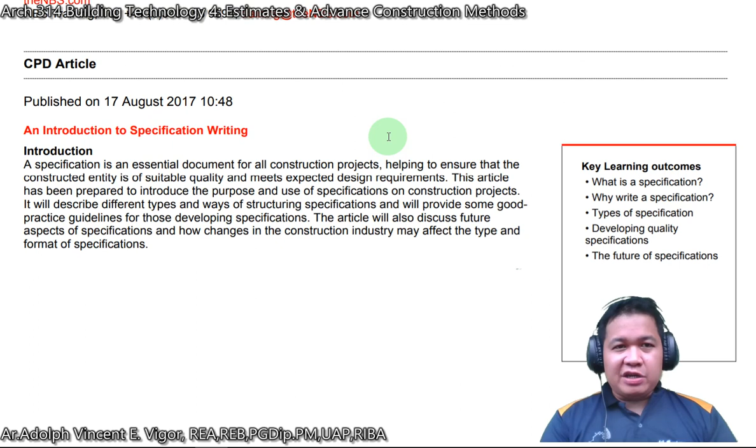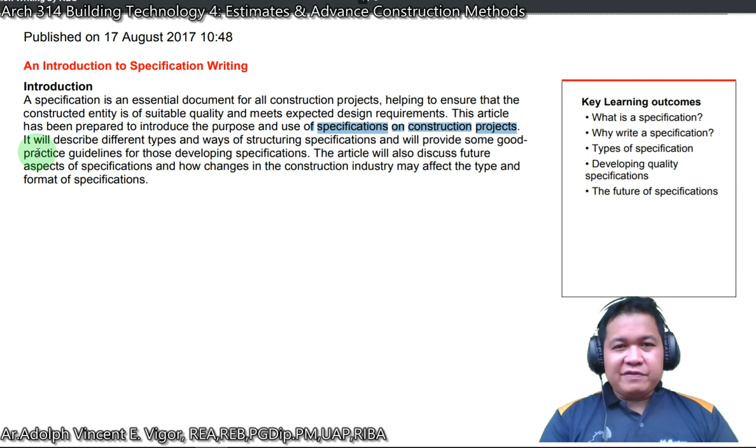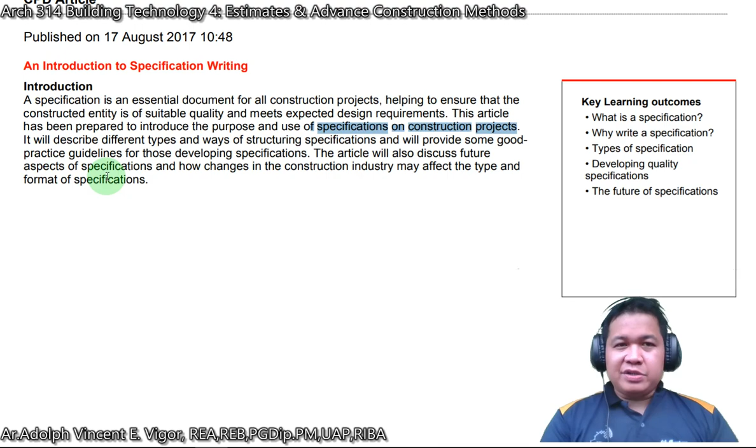According to the Royal Institute of British Architects, a specification is an essential document for construction projects, helping to ensure that the constructed entity is of suitable quality and meets expected design requirements. This article introduces the purpose and use of specifications on construction projects, describes different types and ways of structuring specifications, and provides good practice guidelines for those developing specifications. It will also discuss future aspects of specifications and how changes in the construction industry may affect their type and format. Okay, so let's begin.

So, what is a specification? Specifications may mean different things to different people. The word can be used as a verb, to specify, to describe a process, or as a noun, a specification, to describe a product.

When making decisions every day about different goods and services that we wish to purchase, we are actively specifying. For example, when ordering a sandwich at a delicatessen, there may be a number of options: the type of bread, whether you want it buttered, types of fillings, and whether the sandwich should be cut in half. By specifying these requirements clearly, you should end up with a sandwich that is tasty and meets your approval.

So the process of making decisions and specifying individual requirements is also integral to good design, when determining and communicating the type, quality, and form of materials and components, which is pivotal to achieving effective construction. This process may be informal, or involve the production of a more formal document.

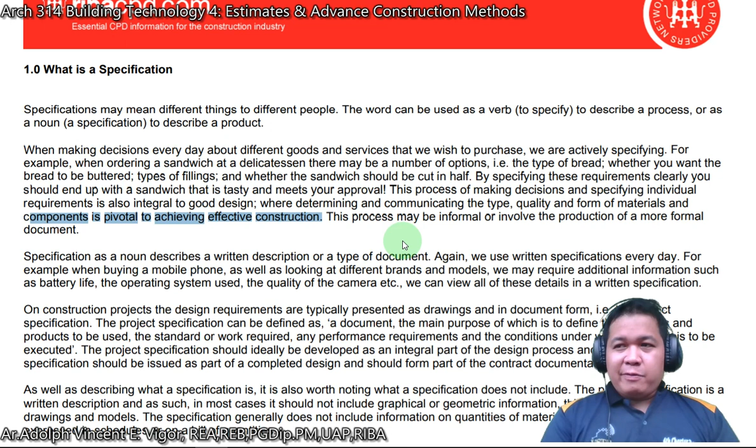So class, when you go to Jollibee or McDonald's, when you order your meal, you specify something. You specify a product that suits your taste, your needs, and the quality that you're looking for. Okay, so that's primarily the most basic analogy of what a specification is. Now, as future architects, part of your job would be to specify many requirements about your design.

Specification as a noun describes a written description or a type of document. Again, we use written specifications every day. For example, when buying a mobile phone, as we look at different brands and models, we may require different information such as battery life, the operating system, the quality of the camera, and can view these details in a written specification. So, for example, class, when you purchase your computers, there's a specific specification that can cater to AutoCAD and SketchUp.

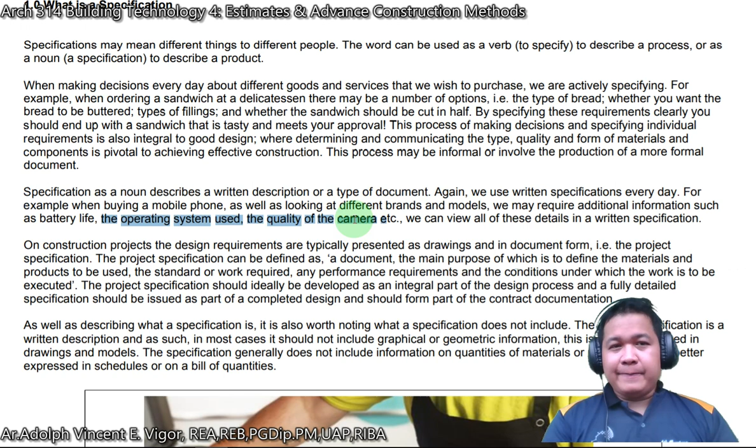For example, when you want a computer that can handle 3D design, you should consider that it should be at least an i7 processor, a minimum of 2GB video card, etc. So that's how you specify. On construction projects, the design requirements are typically presented as drawings and in document form.

For example, the project specification. The project specification can be defined as a document, the main purpose of which is to define the materials and products to be used, the standard or work required, any performance requirements, and the conditions under which the work is to be executed.

The project specification should ideally be developed as an integral part of the design process, and a fully detailed specification should be issued as part of a complete design, and should be part of the contract documentation. Okay class, just like your working drawings which you studied in Building Tech 3, your project specifications are part of the contract documents of your project. So it's really important that it should be written in such a way that it could be easily understood by the owner and the contractors.

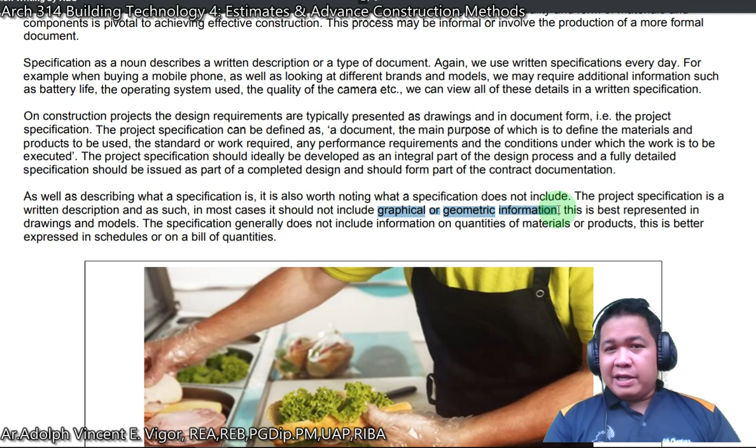As well as describing what a specification is, it is also worth noting what a specification does not include. A project specification is a written description, and as such, in most cases, should not include graphical or geometric information—this is best represented in drawings and models. The specification generally does not include information on quantities of materials or products; this is better expressed in schedules or in a bill of quantities.

Okay, so your specification, class, does not include the quantities of materials or products because that is covered in a different document, called your bill of quantities or bill of materials, which we will discuss after our midterms.

Okay, so how to write a specification. Now let's read this one example.

In 2007, the owner of a luxury house in Jersey ordered the demolition of the building. It had been built 5 years earlier and had sat unused since then. The building had failed to meet the owner's expectations and requirements, and he was disappointed with the quality of the materials used in the final design.

Following a long trial, McGlinn versus Waltham Contractors Limited, 2007, the owner sued the contractor, the architect, the structural engineer, and the project manager. The case illustrates a catalog of errors for a typical construction project, but one of the significant issues raised by the judge was the lack of project documentation. Okay? Take note of this, project documentation.

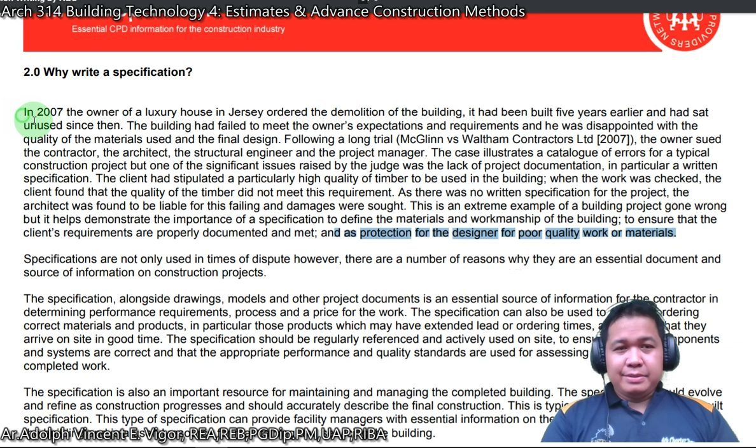This is an extreme example of a building project gone wrong, but it helps demonstrate the importance of a specification to define the materials and workmanship of the building. We ensure that the client's requirements are properly documented and met, and it serves as protection for the designer against poor quality work or materials. This case, in particular, illustrates how important specifications are as part of the contract documents of your project.

Specifications should be presented early in the design stage to the owner, so that there is already concurrence and agreement between the owner regarding the stipulated materials which will be used.

In actual practice here in the Philippines, what we do is that aside from the architect signing the specifications, the owner will also sign within the document so that it would mean that he is in agreement with what is written there.

So those are okay, because it will be a big problem if the expectations of the owner are not met. For example, you are building a two-story house. Now there is no specification for the fixtures. If there is no specification for the fixtures, it will leave a gap, it will leave some sort of misunderstanding, because the owner might expect a higher brand to be used, but the budget will only allow a limited type of product which can be used for the implementation.

So that is why, class, as early as during the design process, you already have a written agreement with the owner as to the type of materials which will be utilized for the undertaking.

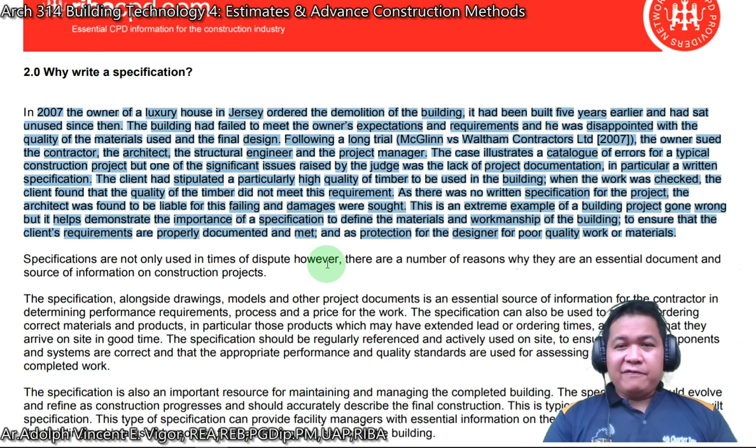Okay? So specifications are not only used in times of dispute, however. There are a number of reasons why they are an essential document and source of information on construction projects. A specification, alongside drawings, models, and other project documents, is an essential source of information for the contractor in determining performance requirements, process, and price for the work.

The specification can also be used to assist in ordering correct materials and products, in particular those products which may have extended lead or ordering times. There are products which you must order 2 to 3 months ahead before they will arrive, to ensure that they arrive on site in good time.

The specification should be regularly referenced and actively used on site to ensure that the components and systems are correct, and that the appropriate performance and quality standards are used for assessing the quality of the completed work.

The specification is also an important source for maintaining and managing the completed building. The specification should evolve and refine as the construction process progresses, and should accurately describe the final construction. This is typically referred to as an as-built specification. This type of specification provides facility managers with essential information on all the products and materials used in the building, and is a useful resource for maintaining and servicing the building.

Okay? So there are three types of specification.

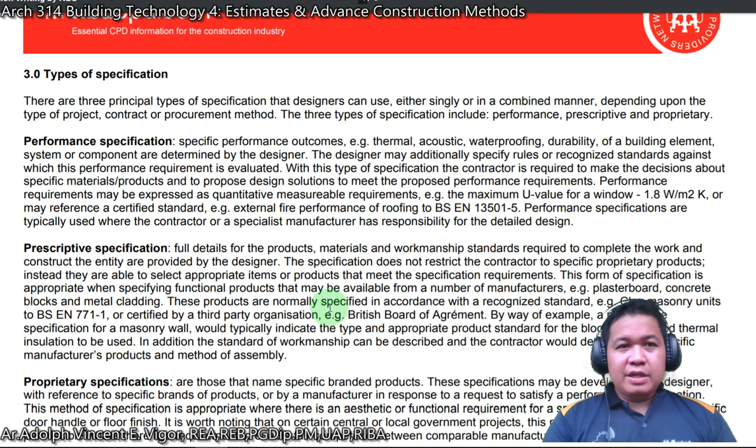First is the performance specification. Specific performance outcomes, such as thermal, acoustic, waterproofing, and durability of a building element, system, or component, are determined by the designer. The designer may additionally specify rules or recognized standards against which the required performance is evaluated.

With this type of specification, the contractor is required to make decisions about the specific materials and to propose design solutions to meet the proposed performance requirements. Performance requirements may be expressed as quantitative measurable requirements. For example, the maximum U value for a window, or may typically reference a certified standard.

External fire performance of a roofing, performance specifications are to be used where the contractor or specialist manufacturer has responsibility for the detailed design.

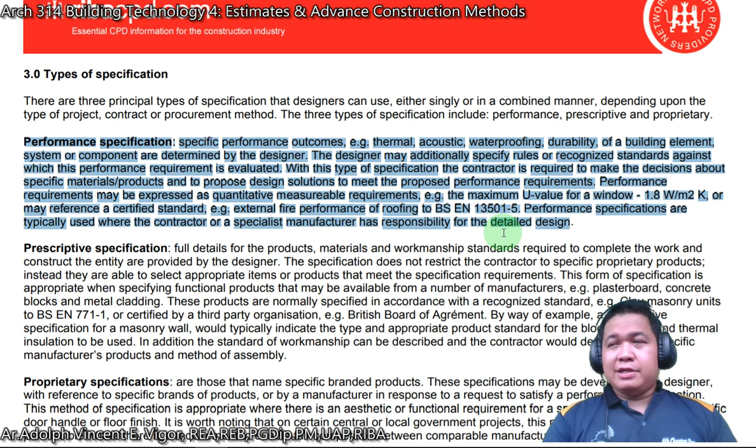NFPA, etc. Then you have also prescriptive. Full details for the products, materials, and workmanship standards required to complete the work and construct the entity are provided by the designer. The specification does not restrict the contractor to specific proprietary products. Instead, they are able to select appropriate items or products that meet the specification requirements. This form of specification is appropriate when specifying functional products that may be available from a number of manufacturers.

Example, plasterboard, concrete, blocks, and metal cladding. These products are normally specified in accordance with recognized standards, clay masonry units to BS EN 771-1, or certified by a third party organization, for example the British Board of Agrément.

By way of example, a prescriptive specification for a masonry wall would typically indicate the type and appropriate product standard for the blocks, bricks, thermal insulation to be used. In addition, the standard of workmanship can be described and the contractor could also decide on a specific manufacturer's products and methods of assembly.

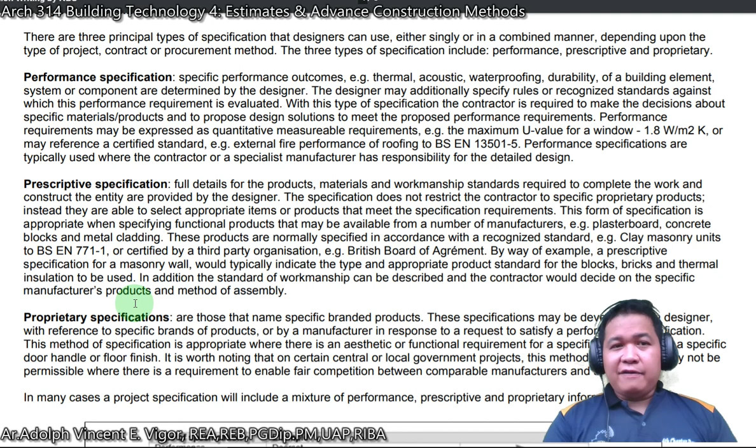Then you have proprietary specifications, those that name specific branded products. These specifications may be developed by a designer with reference to specific brands or products, or by a manufacturer in response to a request to satisfy a performance specification.

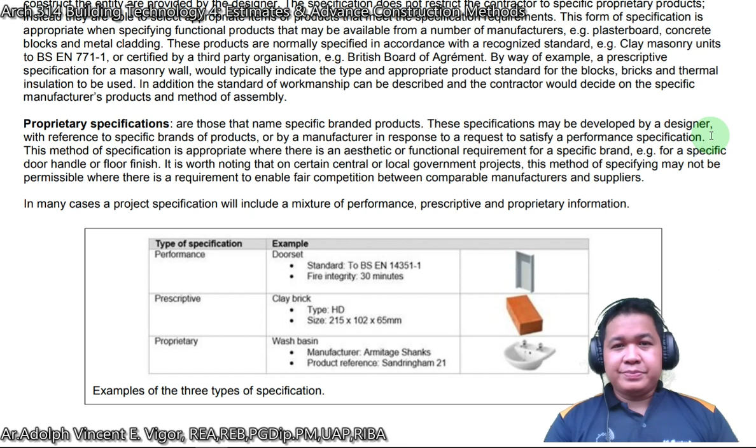So in the three types of specifications class, there is an example for performance. Example, a fire door set. Standard to BS EN 14351-1, the fire integrity should be 30 minutes. So it basically talks about the performance.

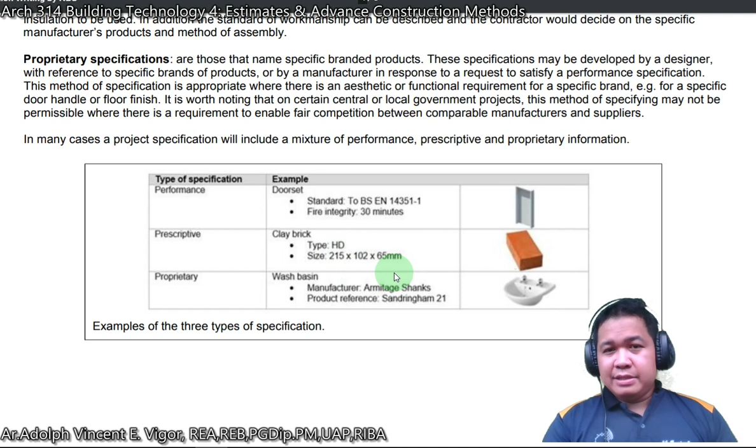Then you have the prescriptive, for example for clay brick, type HD, size is 215 by 102 by 65 mm, but it does not state the brand or how to make those bricks.

Then you have proprietary. Wash basin: the manufacturer is Armitage Shanks, product reference Sandringham 21. Okay, so these are the three types.

So in your future projects, you may select the most appropriate one. But in order to do that, class, you have to be well versed with the different types of products available in the market. Aside from that, you have to understand the different codes or minimum standards that are already set in the industry.

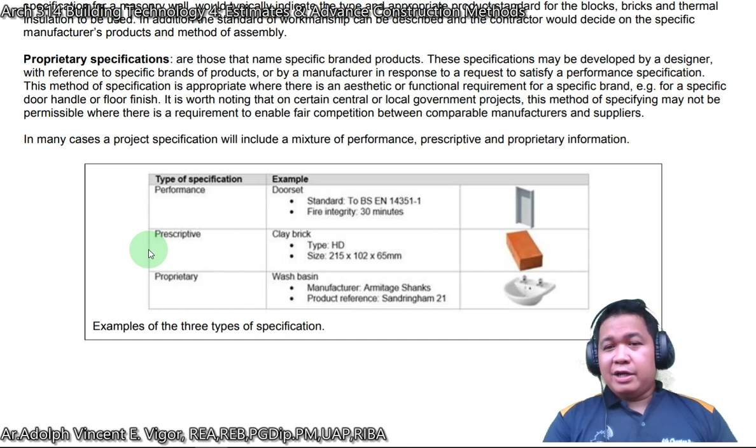So, developing quality specifications. Understanding and learning to produce good quality specifications can take time, and there are a number of common mistakes that are frequently made. This section describes some good practice guidelines to help avoid these mistakes.

One is say it once and in the right place. So what does it mean? One of the major issues with project documentation is the extent to which information is repeated or duplicated. This can cause unnecessary updating and coordinating of documentation, with the additional risk of generating conflicting information.

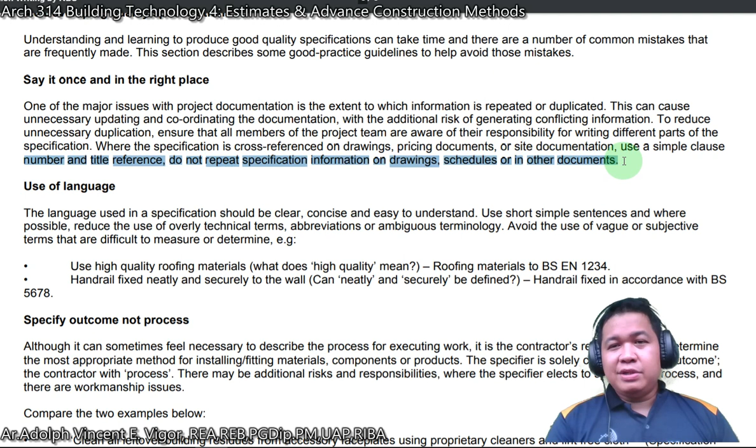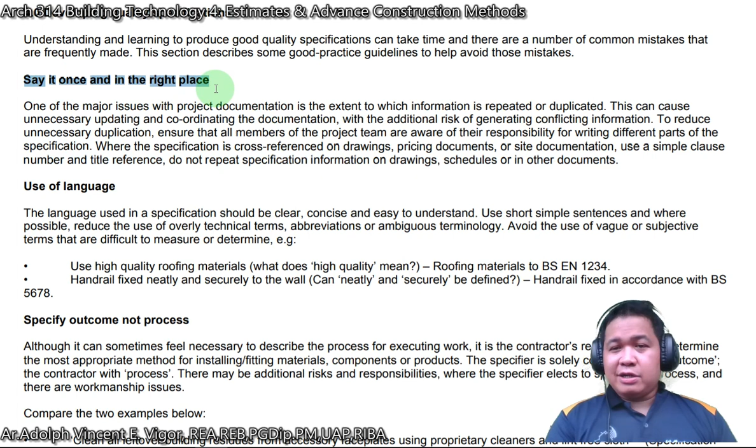To reduce unnecessary duplication, ensure that all members of the project team are aware of the responsibility for writing different parts of the specification. Where the specification is cross-referenced on drawings, pricing documents, or site documentation, use a simple clause, number, and title reference. Do not repeat specification information on drawings, schedules, and other documents. So in order to avoid this repetition, you have to say it once and say it in the right place.

Next is use of language. The language used in specification should be clear, concise, and easy to understand. Use short sentences and, where possible, reduce the use of overly technical terms, abbreviations, or ambiguous terminology. Avoid the use of vague or subjective terms that are difficult to measure or determine.

Example, use high quality roofing materials. So what does high quality mean? When you say high quality roofing materials, it could refer to a lot of things. So you have to be very specific, and for that, you should have knowledge about the different codes.

Example, roofing materials to BS EN 1234. It's just an example, class. Or ASTM standards or NFPA standards.

Handrail fixed neatly and securely to the wall. So what does neatly and securely mean? How can it be defined? So you have to write those things in accordance with a certain code or standard. These are the times when you must cross-reference with the different codes.

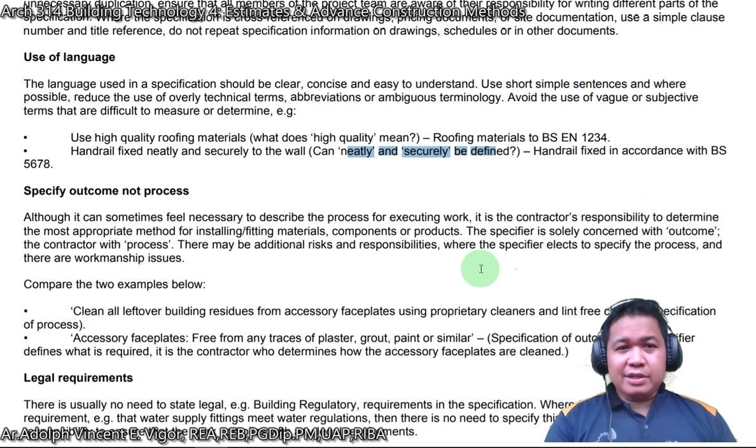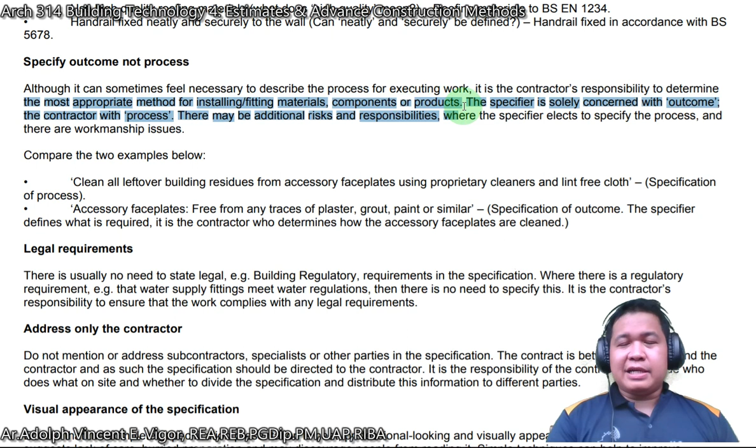Next is specify outcome, not process. Although it sometimes feels necessary to describe the process for executing work, it is the contractor's responsibility to determine the most appropriate method for installing, fitting materials, components, or products. The specifier is solely concerned with the outcome, a contractor with the process.

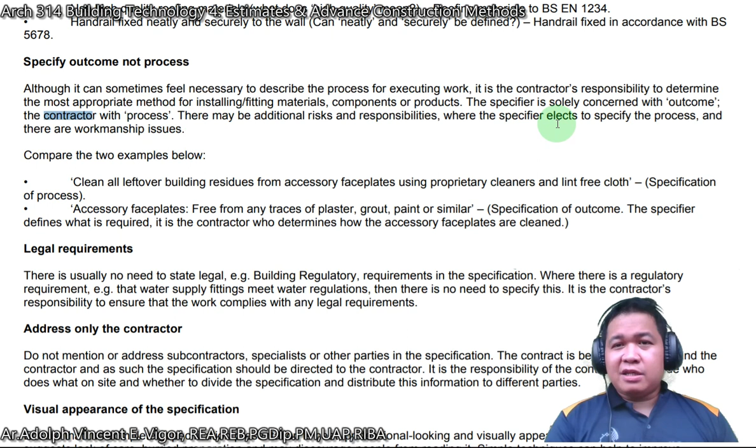So always remember this, class. As a specifier, your concern is the final outcome. Then let the contractor take care of the process. There may be additional risks and responsibilities where the specifier elects to specify the process, and there are workmanship issues. So let us compare the two examples below.

Clean all leftover building residues from accessory faceplates using proprietary cleaners and lint-free cloth. So that's the specification of a process. This one: accessory faceplates free from any traces of plaster, grout, paint, or similar. So this is a specification of outcome. The specifier defines what is required. It is the contractor who determines how the accessory faceplates are cleaned.

So number two is much better because it is much safer, also legally, because you specify only the outcome.

Legal requirements: there is usually no need to state legal building regulatory requirements in the specification. Where there is a regulatory requirement, for example water supply fittings meet water regulations, there is no need to specify this. It is the contractor's responsibility to ensure that the work complies with any legal requirements.

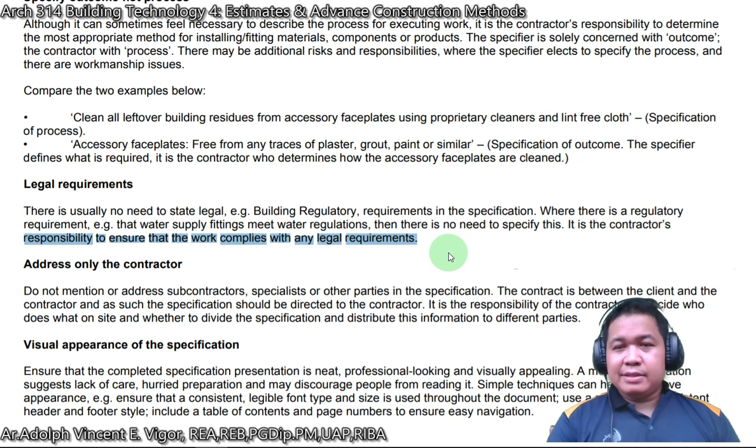Address only the contractor. Do not mention or address subcontractors, specialists, or other parties in the specification. The contract is between the client and the contractor, and as such the specification should be directed to the contractor. This is important, class, to remember. It is the responsibility of the contractor to decide who does what on site and whether to distribute this information to different parties.

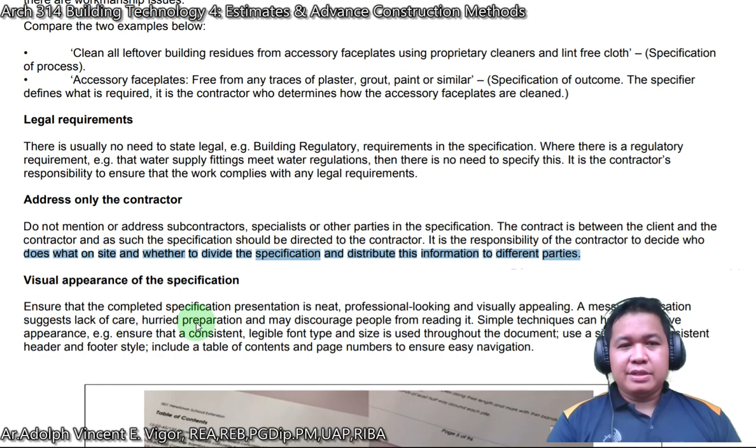Next is the visual appearance of the specification. Ensure that the completed specification presented is neat, professional looking, and visually appealing. A messy specification suggests lack of care, hurried preparation, and may discourage people from reading it. Simple techniques can help improve appearance.

Ensure that a consistent, legible font type and size is used throughout the document. Use a simple, consistent header and footer style. Include a table of contents and page numbers to ensure easy navigation.

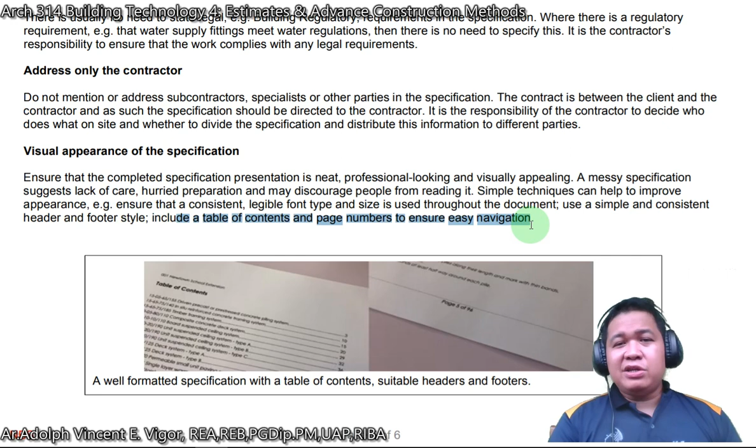So a well-formatted specification with a table of contents, suitable headers and footers. So this is an example, class. It just means that when you do your specification, it should be neat, legible, and easy to reference or look into.

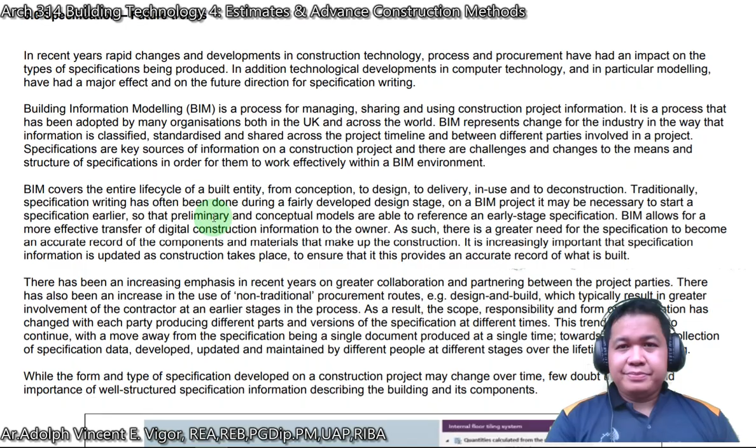Now let's look into the future trends of specifications. This is a long one, I won't be reading all of it, but the future trend of specification is geared toward building information modeling. So when you do BIM, or building information modeling, for example in Revit, when you do your plans and drawings, the specifications are also generated once you have set the program already.

So because of these rapid changes in technology, BIM makes it a lot easier to search for different types of materials which will be used in the design process. So that's the future trend of specification, not only specification but also design, architecture in general.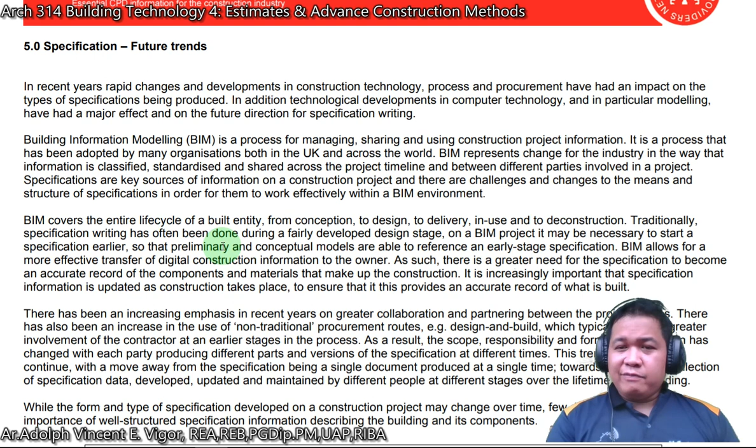So you already have now a lot of technologies available, such as augmented reality and building information modeling. A building information model with linked specification information - so when you do your 3D, you not only generate your construction drawings, but also the building information where specifications are also developed.

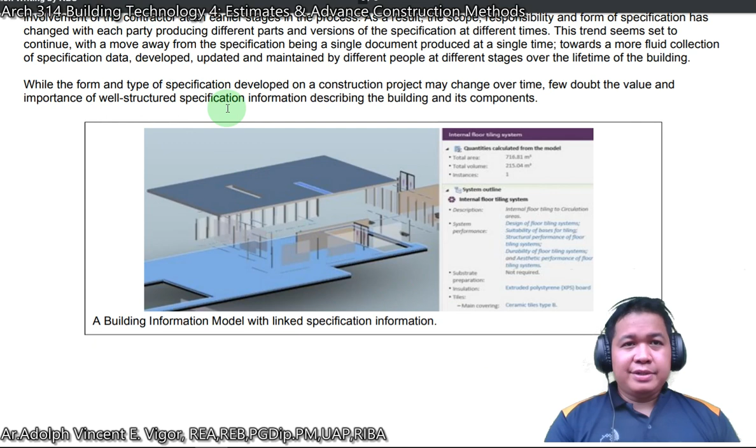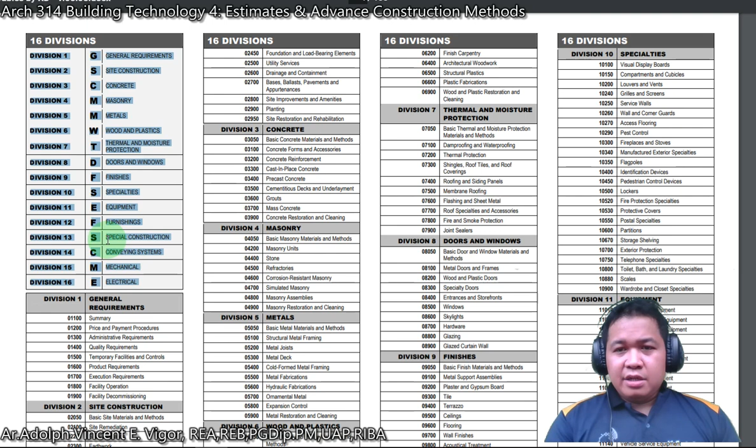Now class, commonly in the Philippines we have 16 divisions for your specification. After midterms, we're going to discuss estimates already. So divisions 1 to 16 will be covered during the first half of the semester.

So when you say Division 1, these are the general requirements. Division 2, site construction. Division 3, concrete. Division 4, masonry. Division 5, metals. Division 6, wood and plastics. Division 7, thermal moisture protection. Division 8, doors and windows. Division 9, finishes. Division 10, specialties. Division 11, equipment. Division 12, furnishings. Division 13, special construction. Division 14, conveying systems. Division 15, mechanical. And Division 16, electrical.

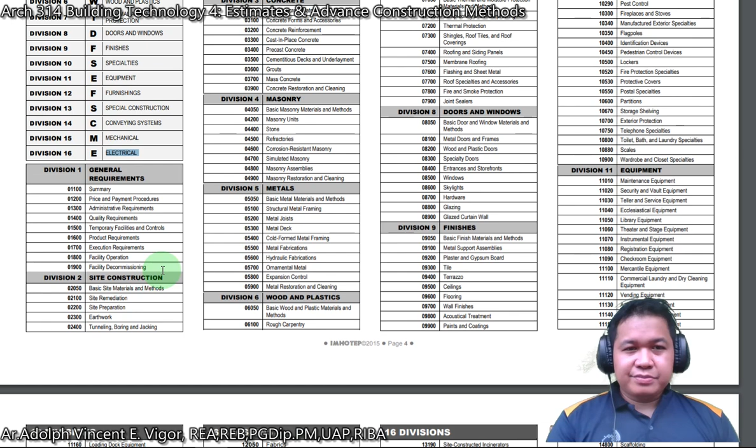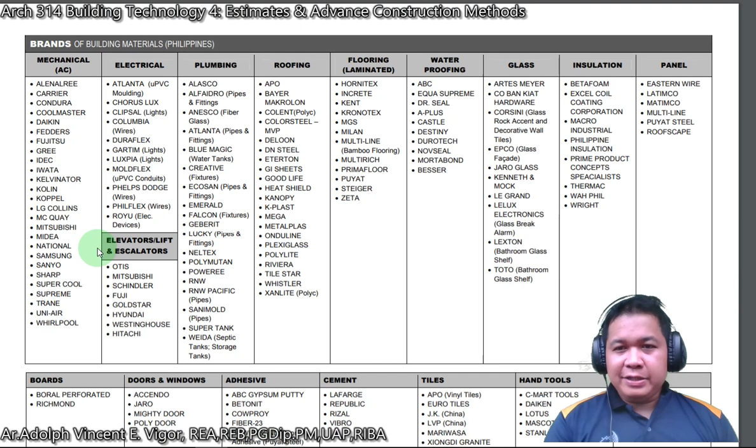So it is listed, all the parts of the different divisions are listed here, and also we have the different brands used here in the Philippines. So I'm going to upload this in our chat group along with our first activity for the week.